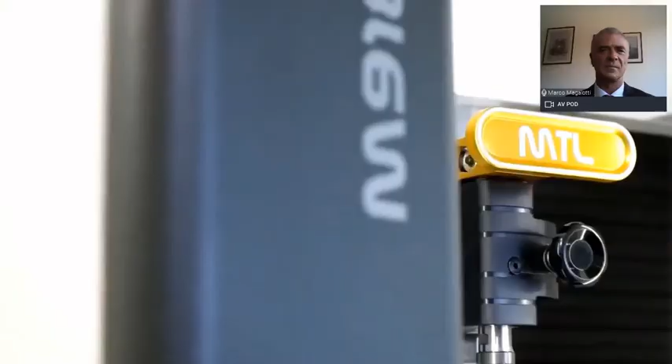Going into detail of some of the benefits in bringing the optical measuring machine to the shop floor. One of the most important benefits is that with the optical measuring machine we can save significant measuring time, and so save a lot of money, and the return of investment will be very fast.

Today's most common scenario: the customer has manual instruments in the shop floor like altimeter, micrometer, and profile projector, and they have to go to the standard room to inspect more complex parts, in order to have a round tester and CMM for other components. We can replace all those instruments with only one instrument directly in the shop floor, and the customer doesn't need a skilled operator to make the measurement, but they can measure by themselves.

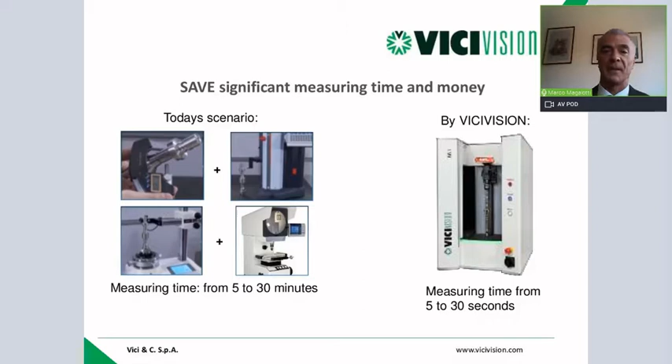Another important benefit in bringing the optical measuring machine to the shop floor is about possible human error. The manual measurement - I saw it myself, also because I did some measurements myself by micrometer, by caliper, by altimeter, especially by micrometer. The human behavior of the operator is to find if the measurement is in tolerance.

Sometimes if the measurement is quite in tolerance, but is a little bit out of tolerance, the operator checks many times in order to get the right value. It is a human error, in human behavior.

Sometimes the error can be in reading or interpreting the value, because we have nominal and tolerance, and sometimes the tolerances are plus and minus. So the operator has to calculate if the value is in the middle of the tolerance. So even without error, the operator only checks if the part is in tolerance.

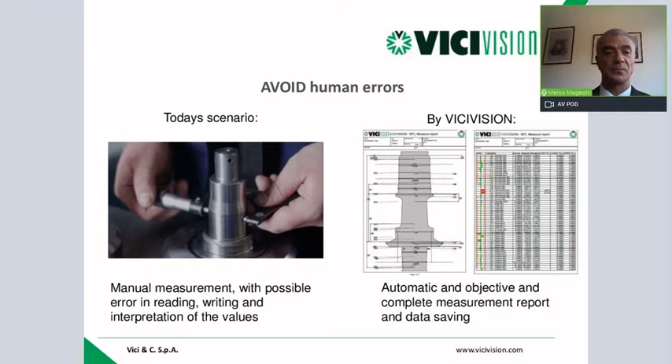We often receive inquiries from customers with complex parts that need to be inspected by CMM or by round tester. They need to get the measurement from the standard room. Sometimes this is difficult because at the same time many CNC lathes have to start production, and there is a queue. The effect of this queue is to keep the CNC lathe stopped, or there is not enough time to inspect the parts, while the CNC lathe is still producing parts. This can create the risk of generating rejects, or of keeping the CNC lathe stopped.

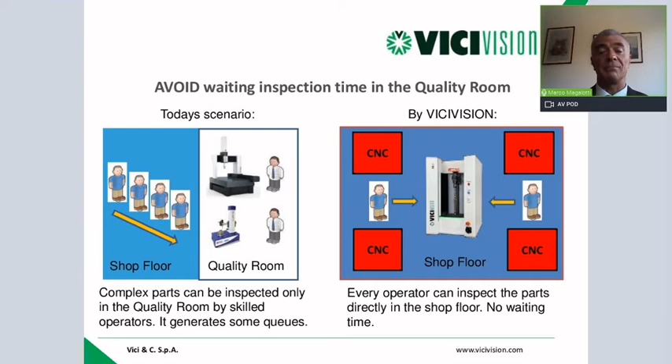With Vicivision, you can put the machine in the production area, where each operator can measure by themselves. Since the machine is very fast, there is no queue, because even if another operator is measuring a part, the waiting time is just a few seconds, not minutes or hours like in the quality room. That's a big benefit.

Monitoring of the production is another good topic. Today, tolerances are smaller and smaller, and the operator usually collects data manually, either by pen or by computer. They have to measure, inspect, and type the value into a computer, or collect data manually in a report. It's difficult to generate a measuring trend or evaluate when it's time to adjust the tool parameters in the CNC lathe before producing a reject.

The ViCivision machine generates a complete report and measuring trend. This means the operator can check by himself when it's time to adjust the tool parameters before producing a reject. This report can also be monitored remotely, so any manager can see the real status of production remotely. That's also important.

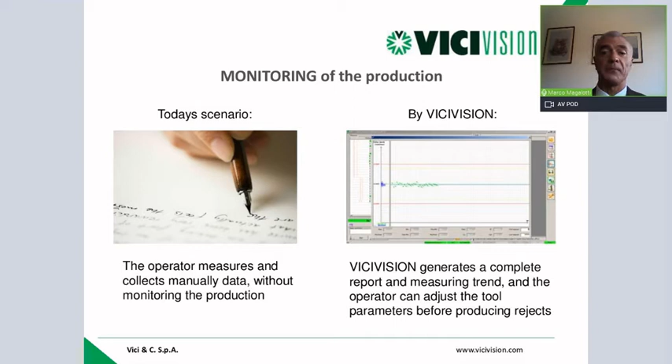One of the most important topics today, everywhere, is Industry 4.0. There is a huge benefit because the full integration of production and testing guarantees full quality, and the aim is to produce only good parts.

We can produce more because we don't need to stop the CNC lathes when there is a need to adjust parameters, because we have a special tool wear compensation software able to automatically correct and adjust the tool parameters on the CNC lathe during production. If you connect your CNC lathe to our machine, our software can automatically correct all the tool parameters without stopping the CNC lathe, and you will produce only good parts. That's the maximum benefit you can have using ViCivision fully integrated in your company, through digital connection to your systems.

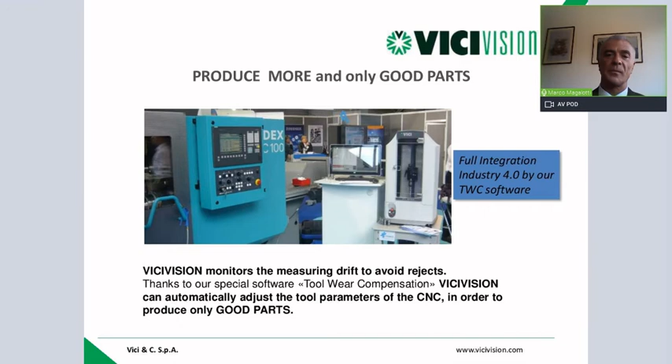I want to give you space for questions, because I don't want to bore you too much with theoretical words. I'm here to explain if you have any doubts, questions, or requests. I'm quite experienced in this division, since I've worked here for 33 years, so I can answer any question you have.

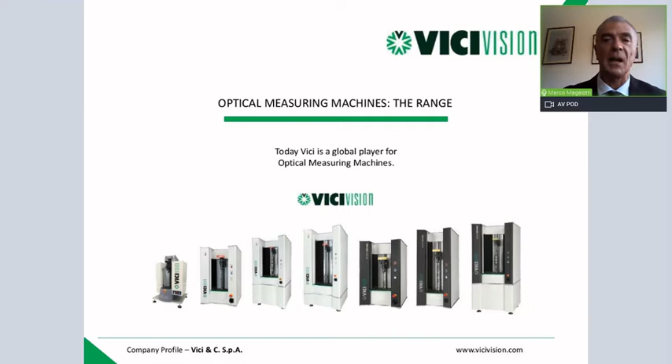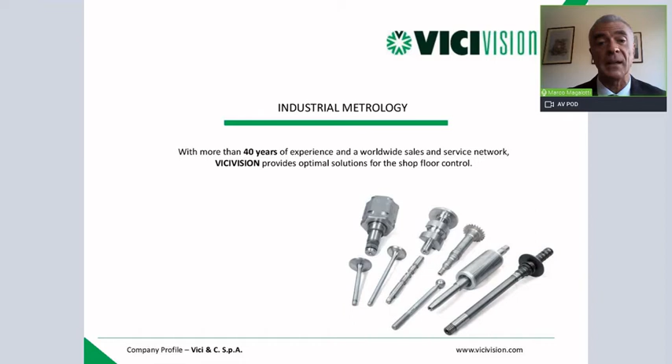Typical applications can be CV joint, engine valves, crankshaft, transmission shaft, rotor, stator, gear shaft, and hydraulic valve. So many applications, and we can... let's go on.

We have more than 40 technical vision centers in the world, and in Mexico there is one that we introduced. So that's a very short overview, and going to the end of the aim of what you are asking me.

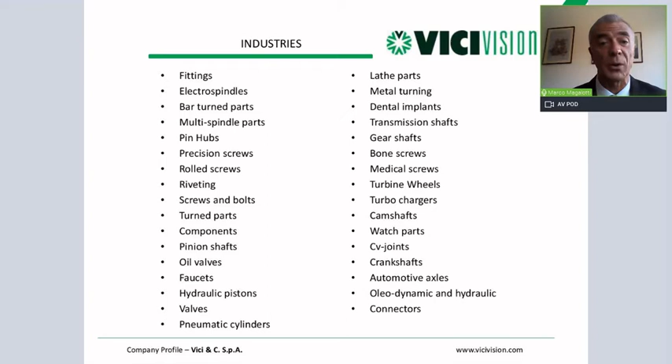This is the industries that we can cover: fittings, electrospindles, bar turned parts, multi-spindle parts, pin hubs, precision screws, rolled screws, riveting, screws and bolts, turned parts, components, pinion, shaft.

I don't want to bore you, but I want to go on to the last question you gave me. We have many key account customers. We are direct supply also to some OEM customers like Volkswagen, Mercedes, FCA, Garrett for engine valves, ThyssenKrupp for crankshafts and also transmission shafts, Magna Group, Mares, ZF. We have many key accounts.

Eaton is one of the first customers, maybe the first customer that we approached with engine valves, and Hyundai. Yes, we have many key account customers. We cannot put them all together in one slide, and every day we are adding other key account customers.

We are also approaching the medical and pharmaceutical sectors, because today the market, due to today's worldwide situation, pharmaceutical and medical industries are having a big increase in turnover, and they need machines too. So if you have any particular questions to ask me about key accounts, GKN and also worldwide.